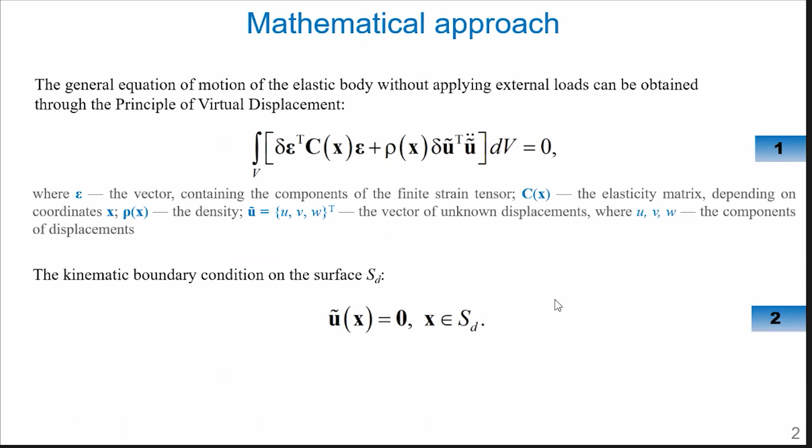Sorry. Well, the first part of my presentation will focus on the mathematical formulation. The problem of natural frequency of a preloaded piecewise homogeneous body is based on the following variational equation. To take into account the pre-stressed state of the structure, it is necessary to consider the strains as finite. They can be represented by the exhibited sum. Here, the matrix S is quite a large matrix, and it is not given here, but it consists of derivatives of displacements like vector S.

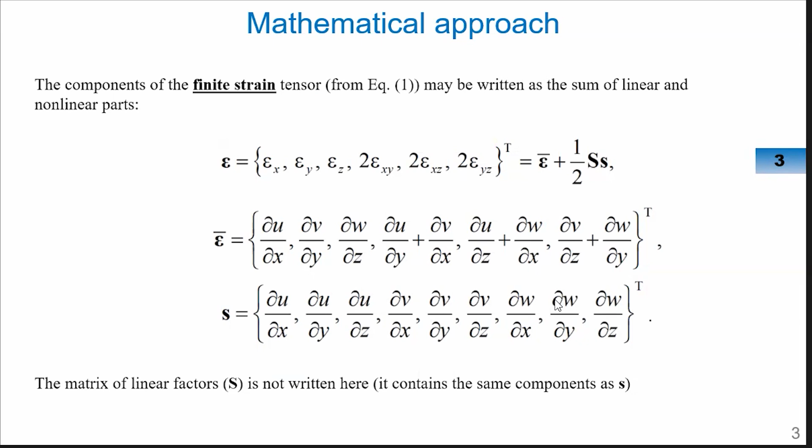Then the problem of natural vibration can be solved by representing unknown displacements in a specific form. This form is the product of two functions. One of them is a function which depends only on the coordinates, and another one contains time in its exponent. After substituting this into the variational equation and performing some significant simplifications, we can obtain the equation for the vibration of a pre-stressed and pre-strained body.

Here are the components that are responsible for both pre-stressed and pre-strained states. Maybe I can point... it's not okay. This component is the pre-stress state, and this big integral refers to the pre-strained state.

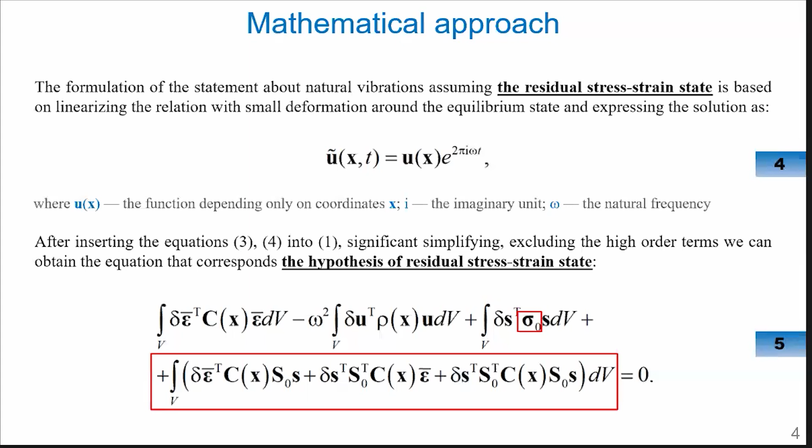Actually, the components highlighted on the previous slide, namely the sigma zero matrix and the initial deformations integral, can be obtained from a preliminary solution to the static problem of loading a body with temperature loads. The numerical implementation was carried out in ANSYS Mechanical APDL software using the finite element method. The discrete form of equation 5, without considering the initial deformation, is as follows.

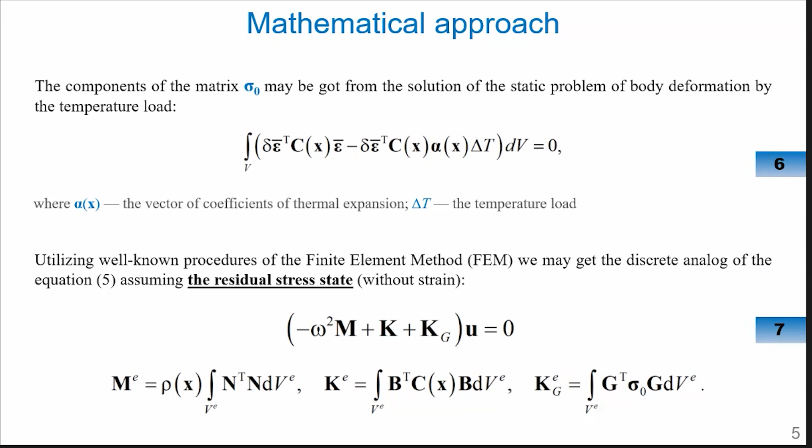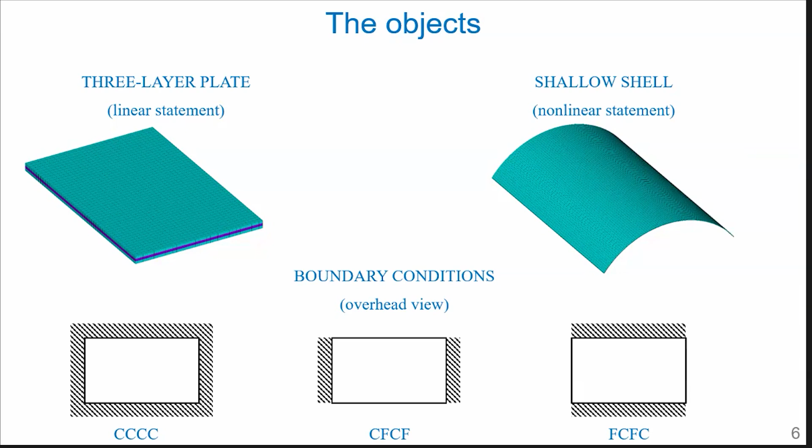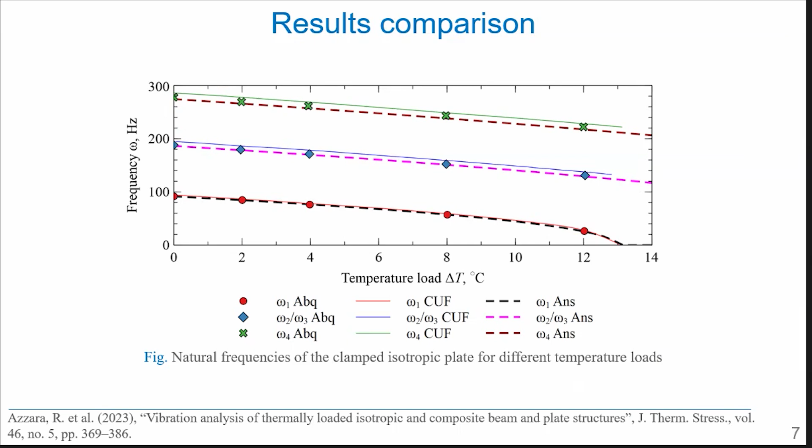A three-layer plate was selected as the object of study where the influence of temperature stresses can be neglected, because we use the boundary condition without any clamp. It was free edges of the plate. Two plate configurations were examined: the ASA configuration, aluminum, steel, aluminum, and the SAS configuration, steel, aluminum, steel. The coefficients of linear thermal expansion of steel and aluminum differ approximately 2 times.

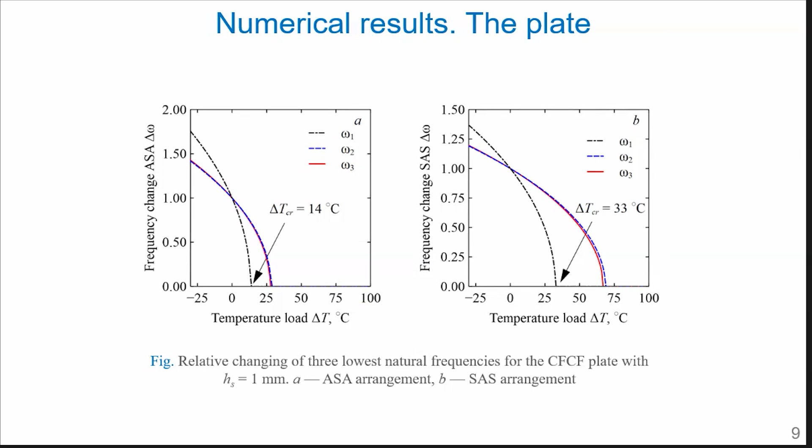The convergence of frequency to zero is only possible in a linear formulation, which doesn't accurately describe the processes near and after the critical zone. However, this linear formulation can still be used to determine the point of loss of stability and the critical load values. Here you can see that there is enough discretization for...

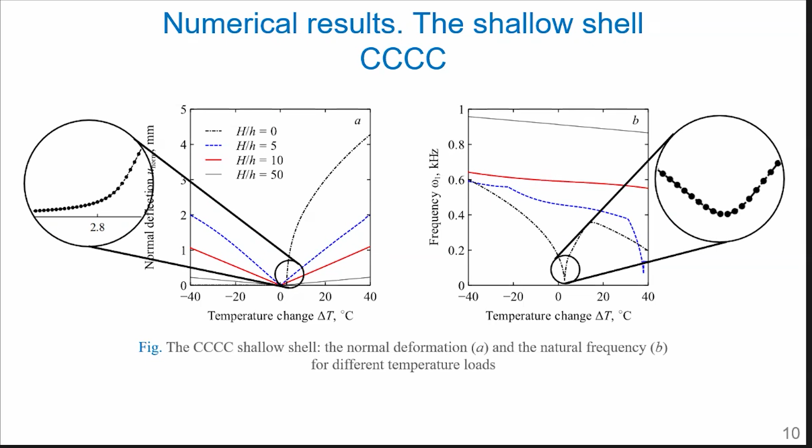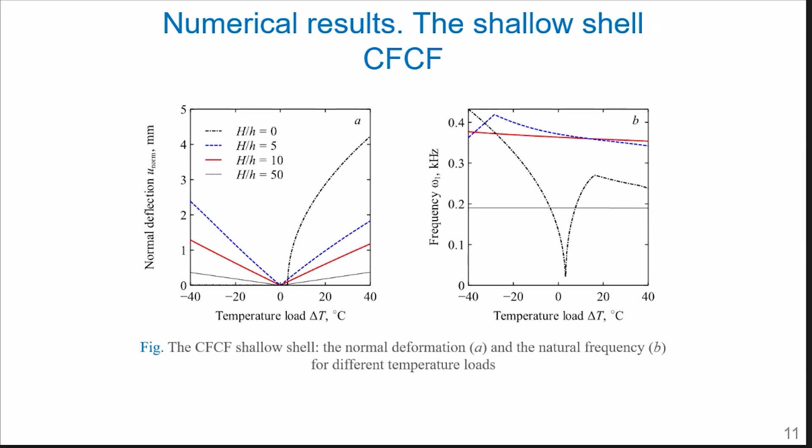However, then there is a change in the forms of vibration, that is, the second and first forms of vibration change places. At this moment, you can see that first the frequency rises, and after some point, it starts to decrease. Here you can see that there is enough discretization for describing the critical zone. This slide shows a different type of boundary conditions where the shell is fixed at two parallel sides. We can see that the frequency changes more gradually than for a fully clamped shell, represented in the previous slide.

So finally, numerical studies have been conducted to assess the impact of the stress field generated by the temperature load on the natural vibration frequencies of plates and shells. Based on the results, it can be concluded that the temperature load has no significant effect on the natural frequencies of three-layer plates with free boundary conditions. However, the effects arising from the boundary conditions are much more significant. If the plate is fixed at two or more edges, it starts to lose stability as the temperature increases.

The study also investigated the natural frequency of an isotropic unstable shallow shell. When the temperature reaches a critical value, the lowest frequency of the shell decreases. However, after the critical temperature, this frequency increases again.